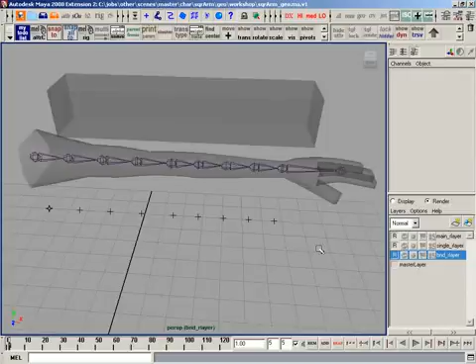Alright, there's a couple different ways we can do that. One way is to use two separate joint chains. One would be our control rig, which would have all sorts of things on it like IK, FK controls, all that sort of stuff. That would then drive our bind rig, which is these multiple joints here.

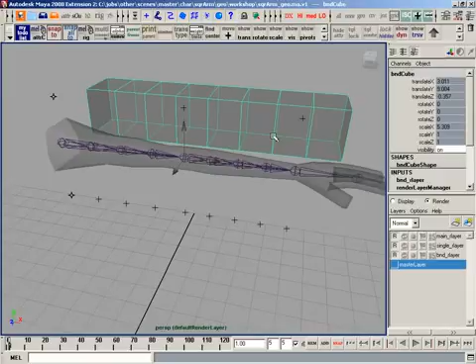The way I like to do that is just with simple connection joints. It's a one-to-one, so you don't need anything fancy, no constraints, nothing like that. The only thing you want to do is split this rotation up into these rotations.

Alright, let's do the simple ones first. The elbow is the easiest, so I'm going to go to my connection editor, load that in, and find my rotates. You may or may not want to restrict rotations in the Z and Y axis because our elbows don't do that. I don't really care, sometimes a little bit of extra there is helpful. So I'm going to connect all those together.

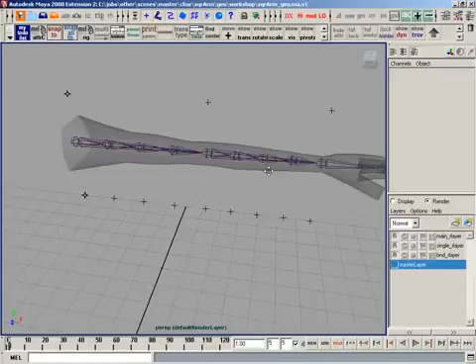So now if I rotate my control arm... whoops, I forgot to check that. Oh yeah, that's a mess. So what I want to do is make sure that all my rotation axes are facing the right way. I have this one wrong and this one wrong.

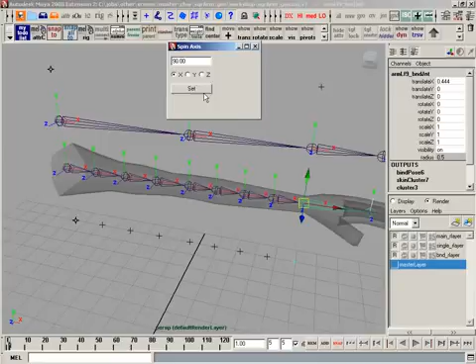There's a script I like to use called CN spin axis, which you can get off Highend3D, and what I'm going to do is tell it to rotate in X 90 degrees until I get it matching. Do the same thing with the wrist joint. There we go. I can leave the connections together that were on there, and you'll see it'll now rotate the correct way. Oh, little snafu there that I didn't look for.

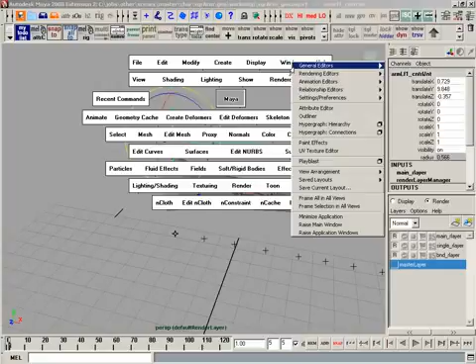Alright, so now what I'm going to do is connect up some of this other stuff. The wrist is probably the hardest one, so I'm going to go back to the shoulder here. I go to my shoulder, load it on the left hand side, bring my shoulder to the right hand side, and find again its rotates.

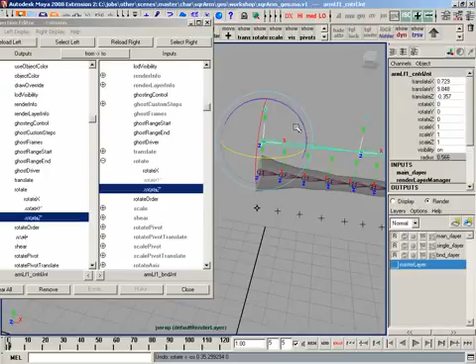Now what I'm going to do this time is rotate in Z and Y of the shoulder. Those will be a one-to-one connection, but then I want to split the X down these four joints. So I'm not going to connect X just yet, just my rotates. I'll test that - there's Y, there's Z. Now for the X, I want to split that up by 4, or divide by 4.

Alright, so here's my multiply divide node, and by default it's on multiply. You can change it to divide or leave it on multiply. What I'm going to do is leave it on multiply, but change this to 0.25, and what that's going to do is basically act like a percentage - 25 goes into 100 four times, so I could divide by 4 or multiply by 0.25.

So I'm going to load that into my right hand side here, and put my rotate X from my shoulder joint into the input 1 X of the multiply divide node. Then I'm going to take that multiply divide node, put it on the left hand side, and into these joints put the output of the X. So I'll first select this joint, scroll down to its rotate, connect its X...

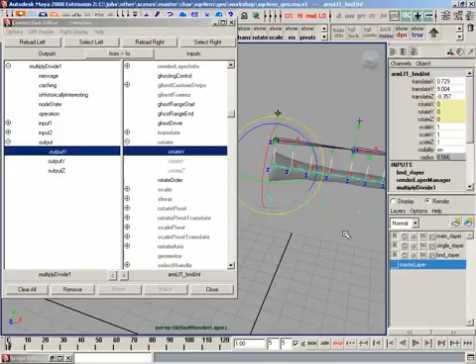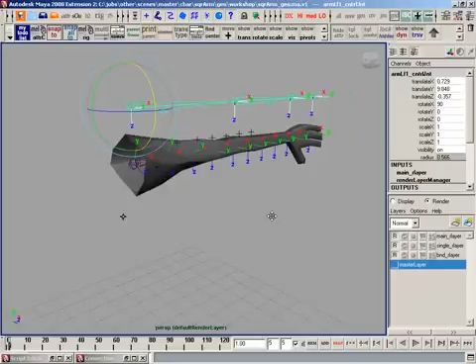Alright, so now I'm going to test this real quick, and what I should see is all these joints should rotate nicely. So if I put 90 in here, we get a nice rotation now. Now this is just a standard bind, so I do have some weirdness with my bind, but I'm not all that worried about it - I'm able to clean that up, simple, smooth. But what I do want to show you is the fall off of these rotations, which is what we're getting. So that's excellent. Now we have our Z, our Y, and our X, and they all work together.

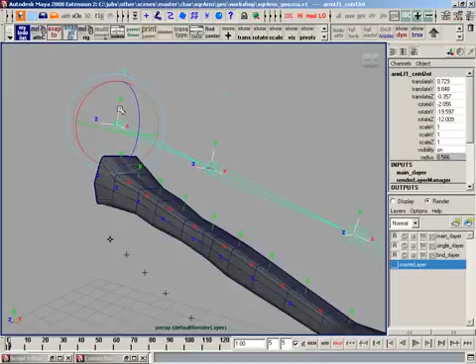Cool, alright, so now the harder part, which is the wrist. So what I'm going to do is get a hold of that wrist, and I want this to be a direct connection in the Z and Y, just like we did before. So again, connection editor, find my rotates, find my rotates.

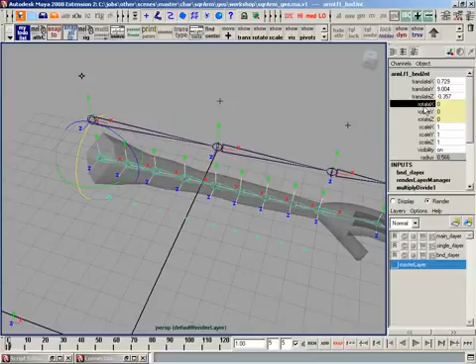There we go. So again, we're going to ignore the X to start. I could create another multiply divide node, but since I already got one up here by the shoulder, I'm just going to use it again. Now the hard part is getting it - I think that's in here. What I can do is go down to select connection, that's going to jump up one, and there's our multiply divide node.

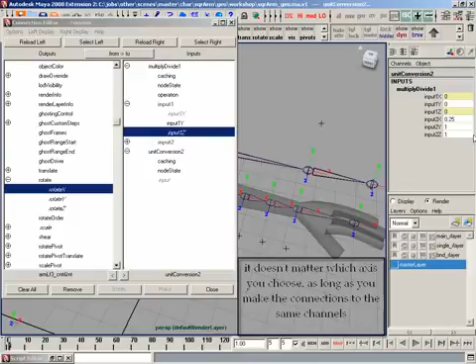I can drop that in the connection editor. There it is. So I'm already using the X, and now for the wrist I'm going to use the input Z. So I'll select, make sure that's in there. Yep, and I'm going to put that in input Z, and just like before, I want to put a 0.25 in there to split it, just like we did before, because we're dividing it. Alright, so now I'll put that on the left-hand side.

There we go, I want the output Z, and I'm going to put that into these joints here. So just like before, find the rotates. X... X... X... and X. Great, so let's see how that worked.

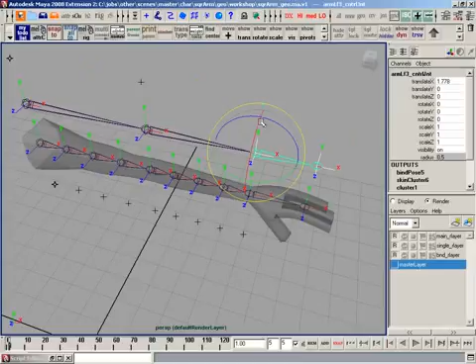Excellent, we have a nice fall off of the joints, creates a nice smooth rotation. I also have my Z rotation and my Y rotation working the way I want.

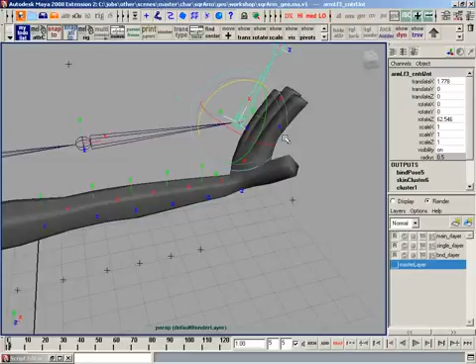Now here's where things get a little bit funky. Now what you'll see sometimes is if I rotate up on, what is that - that's Z, and then I rotate it X, I'm actually getting a different result between these two joints. And that's because of the way that we've set this up.